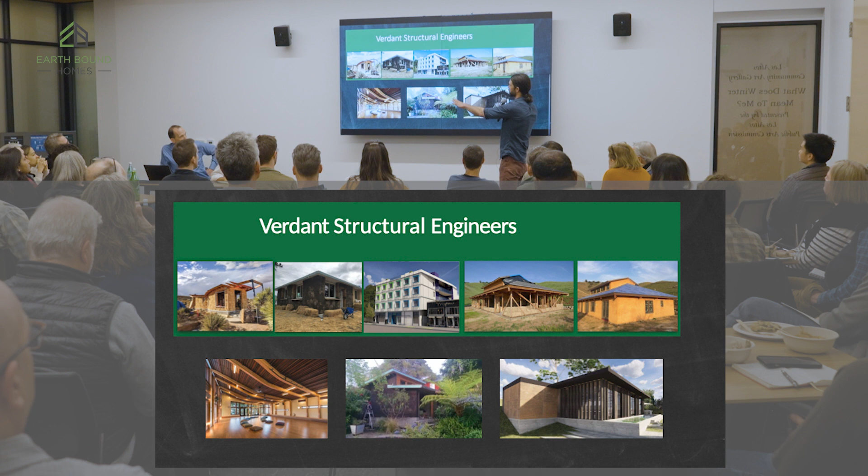So here's our straw bale work. This adobe project down in Topanga. Cob, which is a monolithic adobe form. This is in Berkeley. This is Esalen Institute with the architects down in Big Sur. Innovative wood space, a cool project. Some more straw bale. Next slide.

We have some rammed earth work, and some of our first steps into custom prefabricated straw wall panels. This is a residence up in the Healdsburg area with straw mixed with wood construction mixed with rammed earth CMU. Some bamboo work we did in Nepal, some earthquake relief examples with Builders Without Borders, just some of the breadth of materials we work with.

And as a structural engineering firm, we had the opportunity to be consultants on many materials, and it benefits us to have our hands in all of it. We learn a lot. They're similar in certain ways and different in others, whereas for some contractors, some architects, it's important to focus on one material, but as structural engineers, I feel like it's a great value that's inherent in what we do.

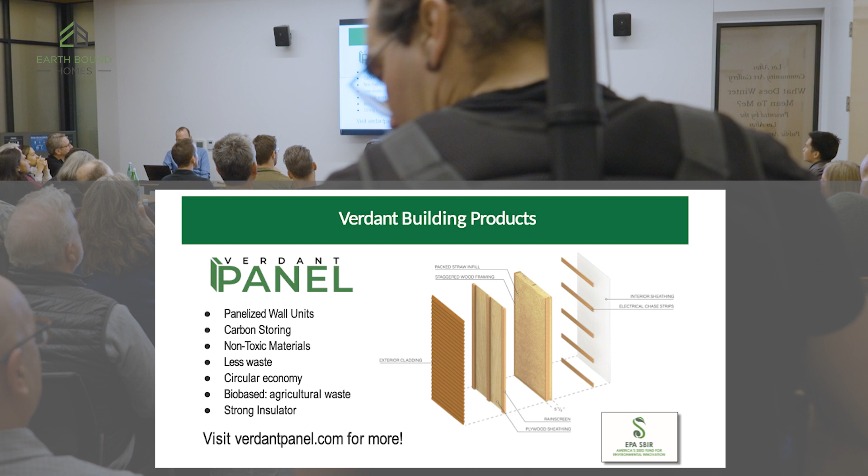I mentioned that we got started with custom prefabricated straw, and over the past 2 years, we were working with the EPA on an SBIR grant, Small Business Innovation Research Grant, to develop a seismically sound insulated straw wall panel of our own. I'm going to be talking a lot about EcoCocon today, which is an excellent product, and there's other frameworks and some other examples on the market.

This is the Verdant panel, my second company, Verdant Building Products. We're solving the problem in a different way, and so we're in development, kicking off beta with this.

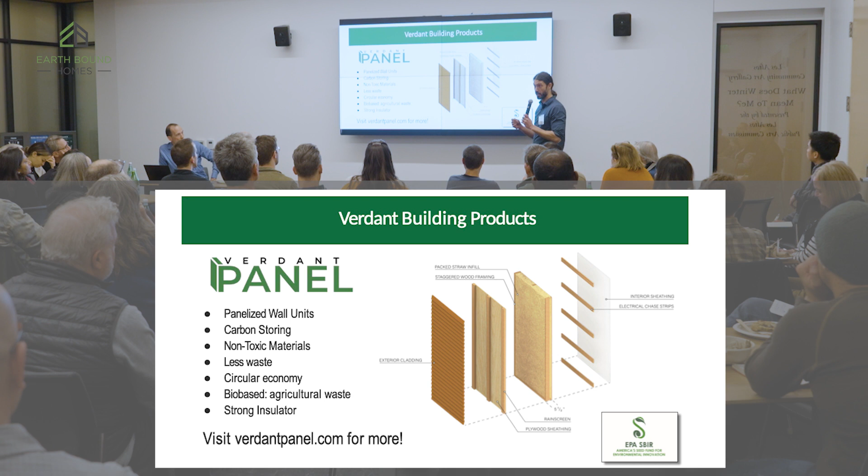Next slide. I'm also on the Cob Research Institute. I'm vice president, and cob is a monolithic adobe material. I can talk more about that, but it's not a feature in this project today. With that organization, I was the lead engineer for the cob or monolithic adobe appendix in the International Residential Code.

And with our research there, we just finally came out with this book in January. If anybody wants more information on mass wall systems, this has all the cutting-edge research we've been working on over the past 15 years. So check it out.

Now, to this project. I'll start with saying that it's great to work with wonderful collaborators. I'm sure you all agree. I'm not telling you anything that's rocket science there.

Committed, caring designers, builders that are really engaging with the design and understanding the intent, and a committed client that wants to make the good things happen. All ends up mixing up into a great opportunity that we like to work on. And projects like this are what help us get up and get to the office every day.

I'll start with the concrete. We mentioned the concrete, and I'm happy to show the Ashland project there. One big thing about that project is it just didn't have as much concrete. It didn't have a basement. It didn't have retaining walls. It didn't have retaining walls that had to act like they were in a lake. And it did have a relatively similar cement content in its mix, though.

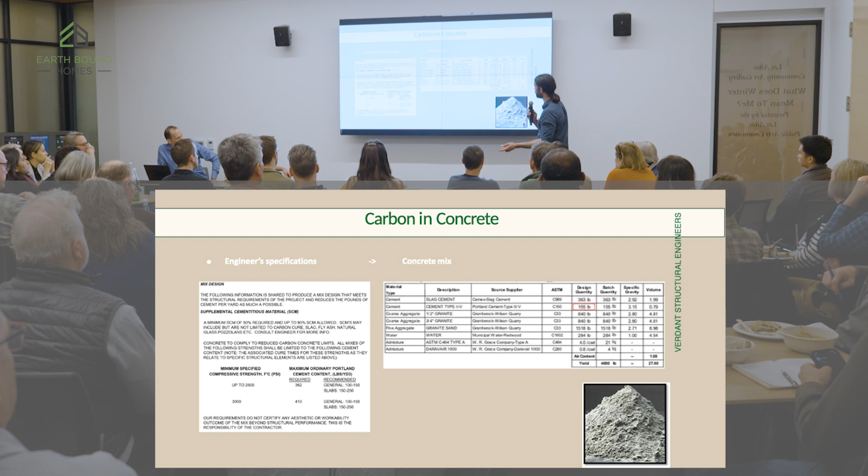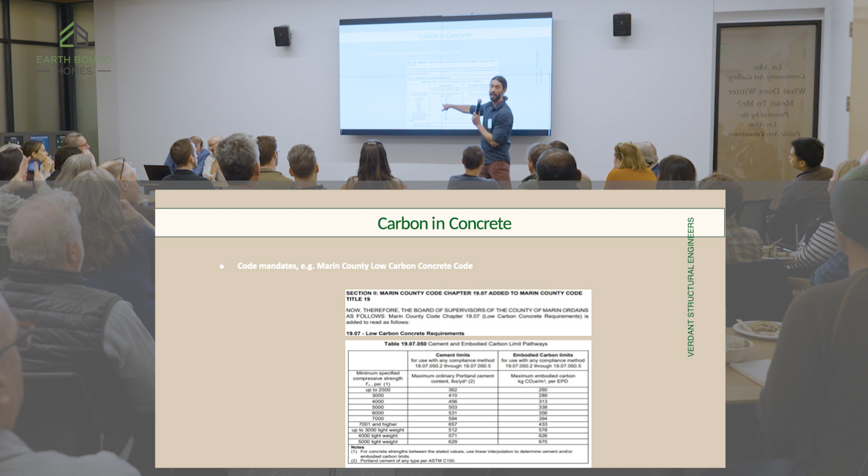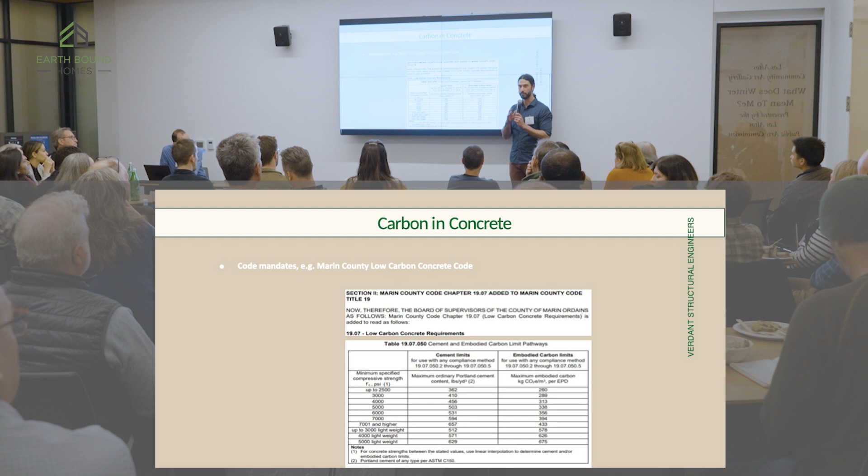Next slide. This is the Marin County low carbon concrete building code. This is the main section of it, where you see that up to 3,000 psi concrete, the Portland cement per yard, 410 is what they recommend. And if you recall on my last slide, we had 150. So this is them trying to limit, and some were going to 600, and we're down at 150. So it's a big step forward. We need to get to zero, one step at a time, until we all melt.

So, straw construction. I moved out of Pennsylvania about 15 years ago to practice straw bale structural engineering under Kevin Donahue, structural engineer. He's now my business partner, our senior engineer. We've engineered just about every way you could think about putting straw in a building. Laying bales flat on the ground and using a reinforced plaster system is the most common, though it's labor intensive. So you have parties, but not everybody has the opportunity to have that. The walls are thicker, and your engineers are involved with your mesh, the tilling and plaster. So there's got to be a better way.

Why don't we use plywood? There used to be a larger concern about plywood over bale walls for moisture exchange, and a lot of modeling that Davis Projects, along with Dan Johnson of Beyond Efficiency, a building science engineer, did has opened the door to us using more plywood. So now we're seeing folks, which is actually on the next slide. So this reinforced plaster system is very common.

You lay bales flat, you can put them on edge. Now we're finding ourselves doing a lot of this: put bales on end, between studs at 24 inches on center, and put plywood sheathing over them. It's still pretty labor intensive, and we're working out the kinks. It's like an odd wood framing system. And that's what gets us to these prefabricated panel ideas, because the oddities of trying to fit straw into conventional practices take another step back, and we're just dropping these off at the doorstep.

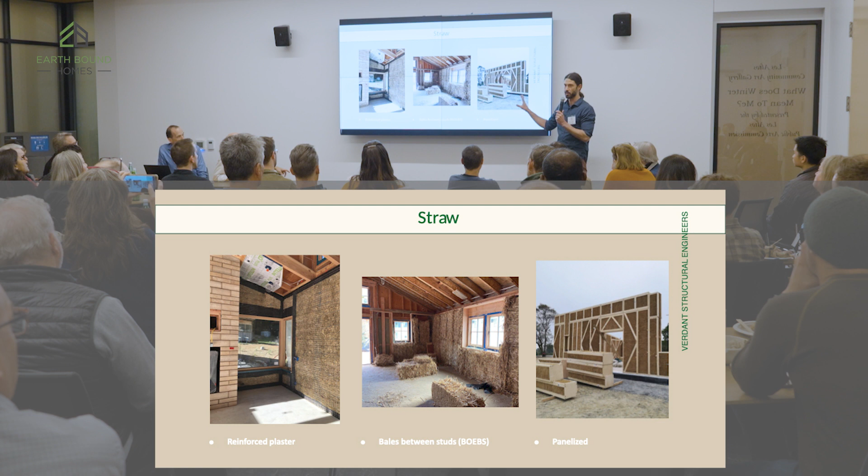And if you go back one slide, I mentioned Appendix S here. This just got a new title in the International Residential Code, but for the past 10, 15 years, there's been a group of us entering these alternative materials into the appendix of the International Residential Code, which turns into the California Residential Code for anybody who doesn't know. And we're working on getting all those adopted into California.

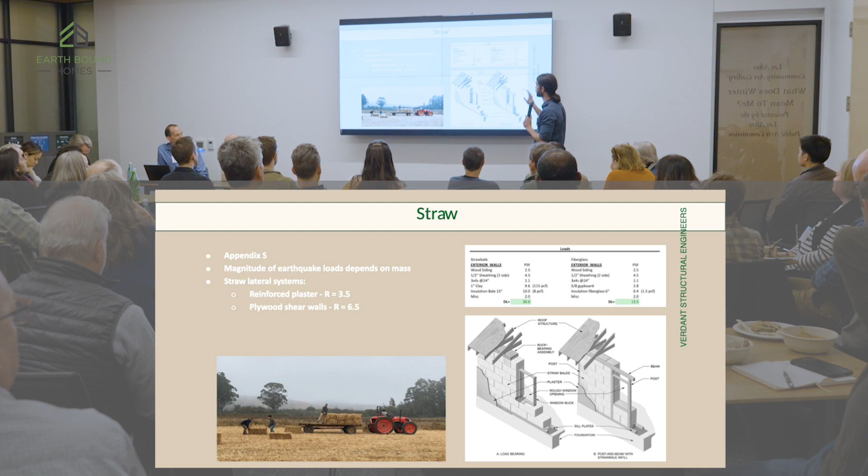I could talk to you about that, but there's hempcrete, there's tiny homes, there's straw bale, there's cob. We're advancing the Adobe Code, which was in the IBC, with a committee in TMS, the Masonry Society, which is the main masonry reference code. But just know that these codes exist. Light straw clay also has an appendix. And now let's go next.

This project, happy to share the architectural floor plans. This is a presentation by a structural engineer; my drawings are not going to be as nice. But just because we have these nice panels showing up doesn't mean things aren't complicated. This is a nice custom design, and it has the complications of those Palo Alto issues.

that's why we give presentations like this that maybe not show total warts and all, but this is not necessarily just because we're getting out of bale by bale construction, it did add time in the office for sure, in collaboration with them, preparing models, making sure things were all lined up, making sure that your hold downs from your second floor, which might end up on a straw wall. Like in this case, the second floor walls ended right here.

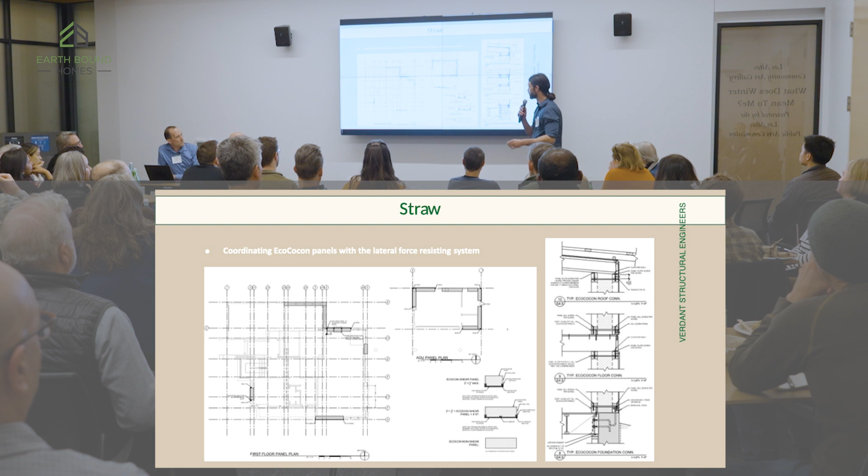And so we had hold down straps coming down to that EcoCocon wall down below and just making sure they were going to have a stud in that panel right there so that they could receive the strap, things that were very important. I lost sleep over it, kind of.

The rammed earth panels that I mentioned, Rammed Earth Works has been a company doing rammed earth construction in California and beyond for a long time. Dave Easton ran that company. He passed away very unfortunately to all of us in the community not that long ago. But he was developing both a CMU rammed earth equivalent, but also these rammed earth panels. And Burton's been doing engineering with the panel company to help them optimize how it's connecting to the building.

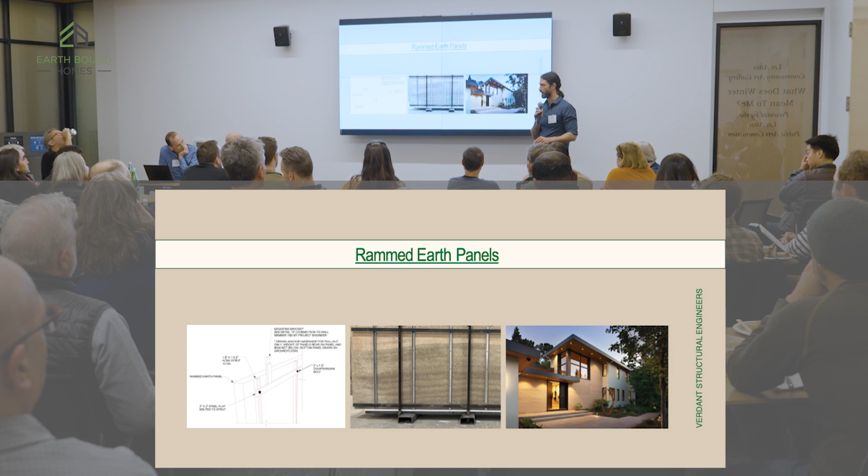It's just generally a facade, complements a cladding element. It's a non-structural feature, but still has structural consequence. And it's very beautiful, and offers an opportunity to have a rammed earth look at your house without that kind of space. They do stabilize these mixes, which means they add cement, and the whole earthen building community is always exploring the right stabilization for the right mix, and I can talk about that for a long time, but I won't unless you ask.

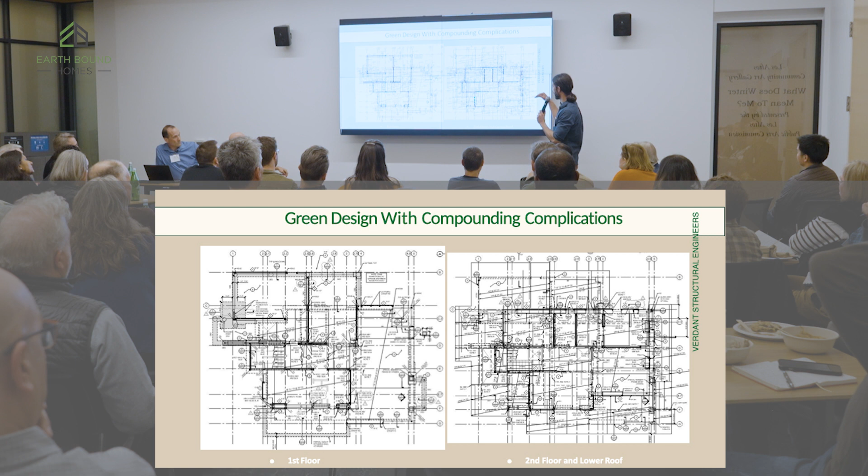Back here we have a very large opening for access to the back. Nice sun. It's a good sunny angle. Next slide. We ended up putting a moment frame in there, which is a system not commonly used in residential construction, but it's versatile. It opens up a space, and it also has a very high response modification factor. So it's a measurement of ductility in a lateral system, and the reason that it's important.

Mass times acceleration equals force. And we have wall panels in this building that are more massive than usual. And so we have more seismic force to deal with. It's also a decent sized residential building. And the way that the code has you account for how much of your mass transmits into earthquake demand force is accounting for the ductility of the lateral system you're using.

And if your lateral systems are stiffer, then more of your mass translates into force. And the stiffness of some wall lines can affect how much force other wall lines get. So if you just need to change one wall line, it's nice to change it to something that has a large response modification factor. We have flexible floor diaphragms as structural engineers, and I can get into this, but sometimes we have to idealize as rigid and this and that. But there's also this kind of minimum sizes these things go down to.

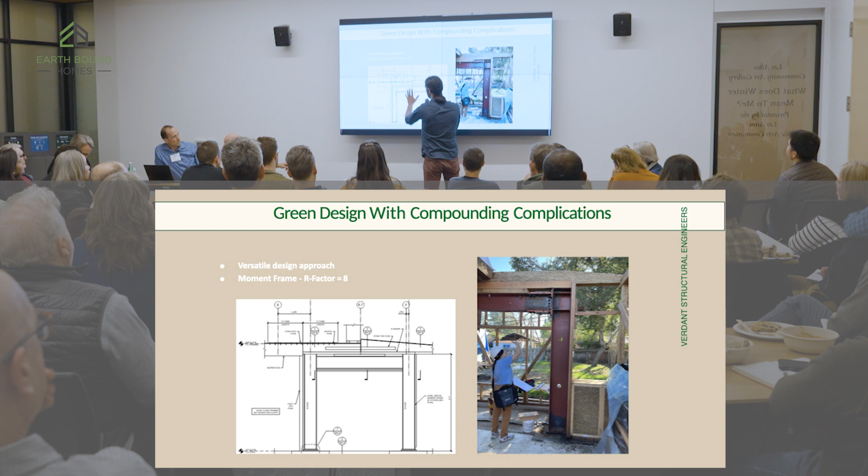Here's some lateral load collection lines of differing heights. Here's that one sloping roof that actually meets slightly up the one wall, while we have this other floor diaphragm coming in, collecting that wall and getting it there. Just some unique aspects of this project. But next, other interesting connection details. Happy to talk more about the funky things about them, but I might have shared enough,